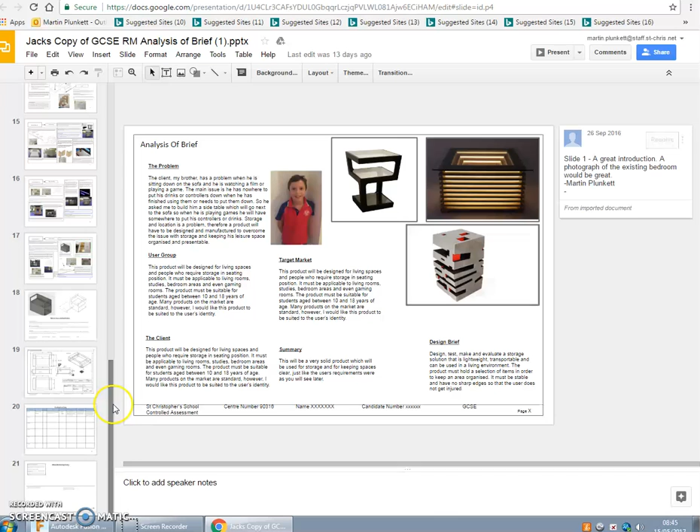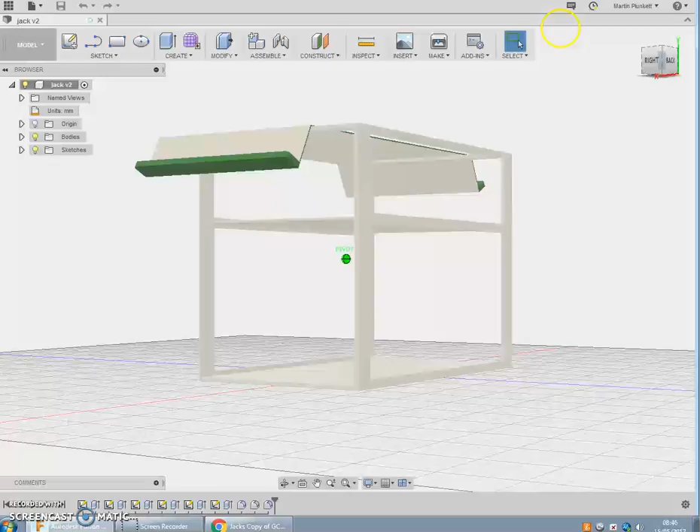Now, if we look here, you can see there's the product. Looking at the journey, I'm going to take you through a whole tutorial of how to build this storage unit for a computer console, PlayStation 4, games and peripheral devices.

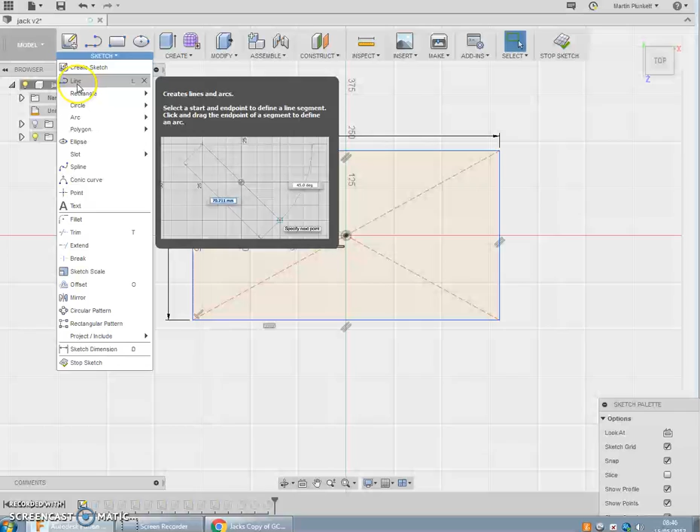So the first thing we do, if I just edit sketch, you can see that the table was 800mm by 450. So all we'd do is go up here and sketch a 2-point rectangle, 450 by 800. That would be your base. If I just go into an isometric view, stop sketch, you could then see the next stage.

Would be to extrude that to a height of 600mm. So if you go back to that original 800 by 450, I've extruded that to 600, so you end up with a solid rectangle.

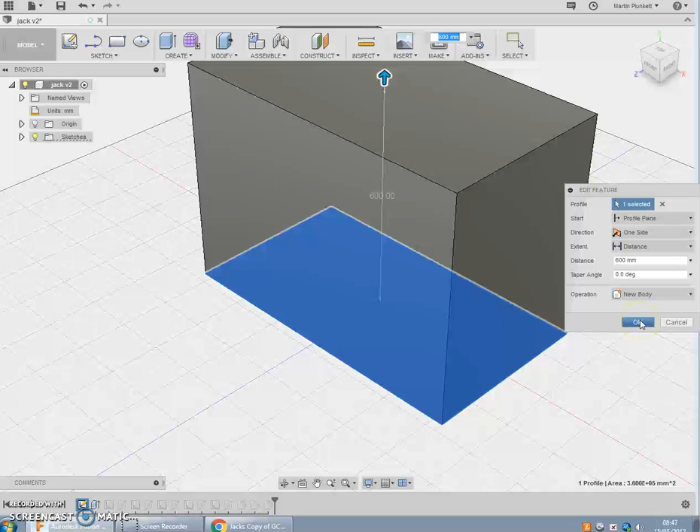Now, many students struggle with this, but if you make it to scale, exactly 1-to-1 scale, then it's very simple to turn that into a DXF file. You can save it and CNC machine it on a router. So if I just click on stop sketch again, good.

The next stage, what I would do then, I'd look at the side profile and I would draw two rectangles, again 2-point rectangles with an 18mm thickness. In fact, in this case, it wasn't 18, it was 9mm oak-faced MDF that we used.

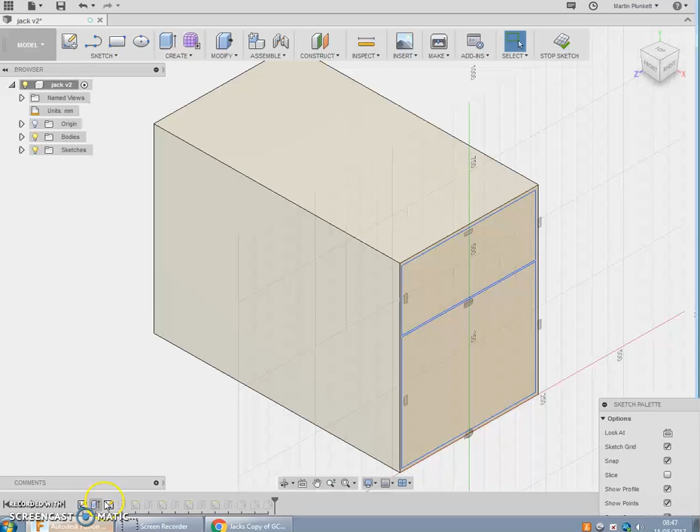Again, if I click on stop sketch, you can see on the next bit there, all we would do, we'd cut that through both sides, so you'd end up with a shell. That would be the upper shelf, and that would be the lower.

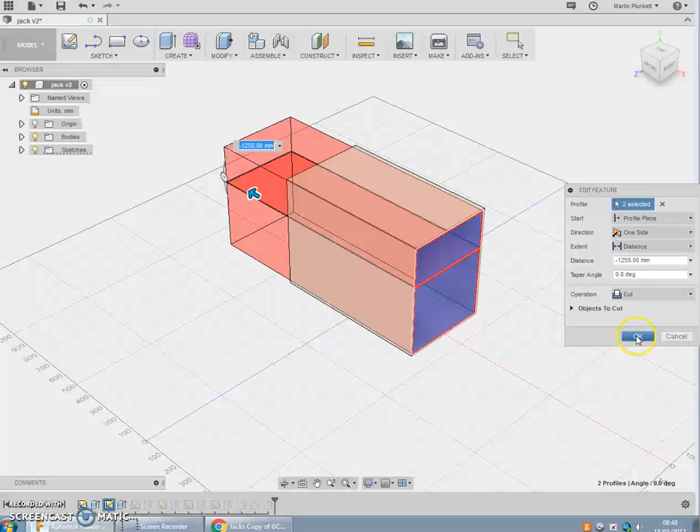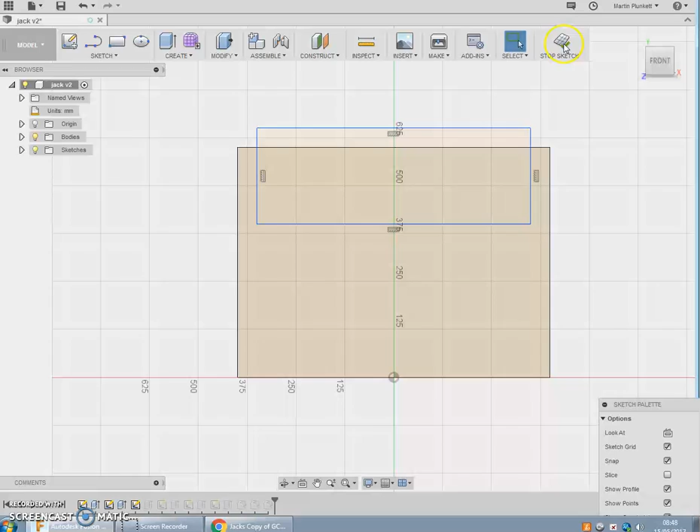And it's quite a nice way of teaching your students how to produce a GCSE project. So the next sketch, if I look at the next one here, edit sketch, you can see now that I'm going to cut out that whole section because that was going to be the roof part of the product.

So if I click stop sketch again, you can see what happens with that. Edit sketch, and that would be cut back 400, leaving a space at the back, because on top of here there's going to be a drawer. We're going to use two interlocking hinges that slide out on a roller system, with a push fit.

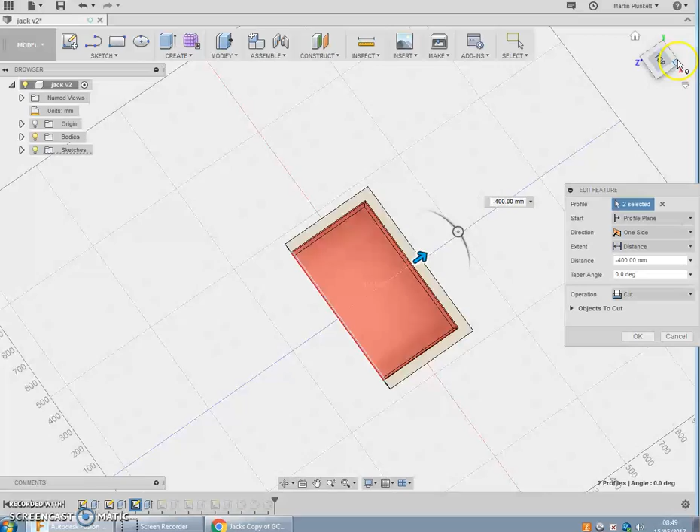Very useful indeed. So the drawer would slide out over this part, over this compartment. So I'm happy with that.

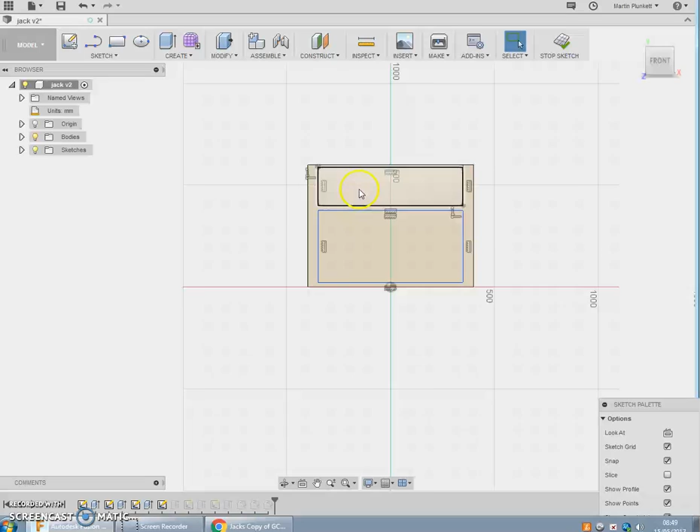So the next stage, we'd look at this part. I would just double check that you've cut out the bottom and the top. Again, we're removing that material, and this is where you're going to store the PlayStation. It could either be top level or bottom, it doesn't really matter, but the student has considered all the dimensions for the PlayStation console and the games, and they fit into the upper or lower part of the product. So I'll stop sketch again.

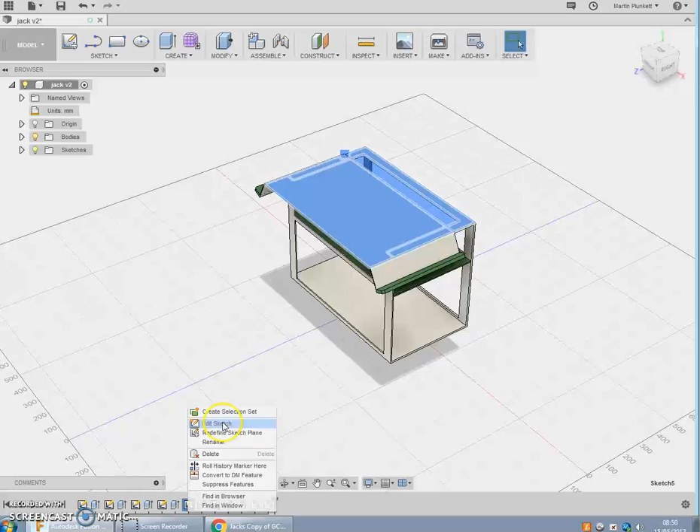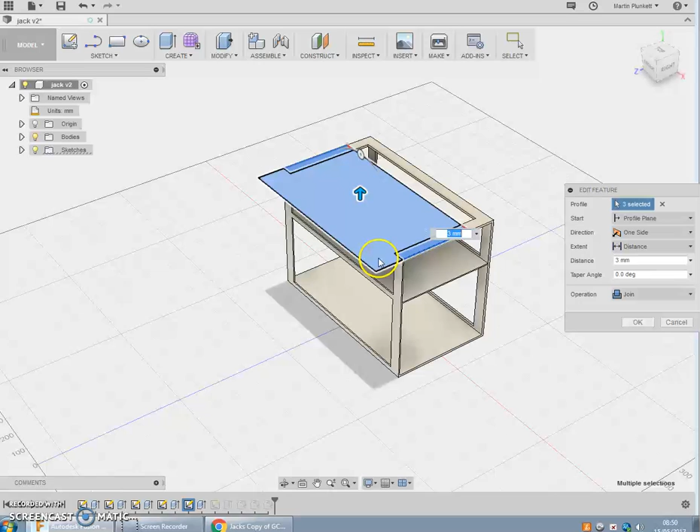The next stage, what I've done here, you can see we've mapped out that section. And again, edit feature, this part would need to be extruded to 3mm, because 3mm was the thickness of the acrylic. The acrylic top that slides over was 3mm. So that's a good start.

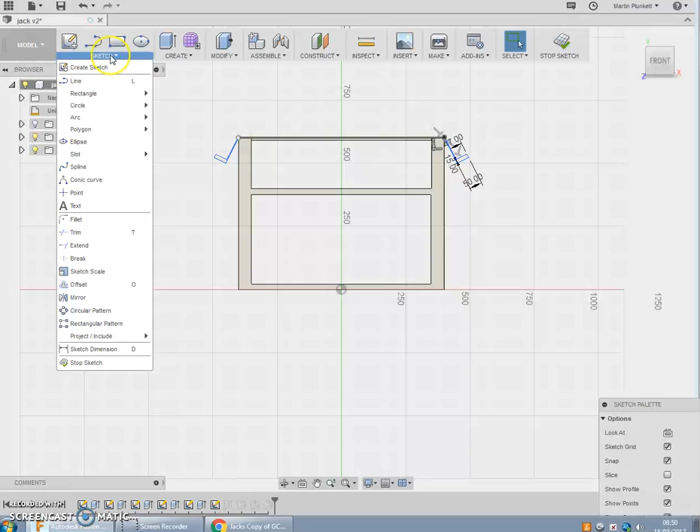After that, edit sketch. We then draw the two sort of L-shaped pieces, and what I always tend to do is put a centre line in. I've deleted it on here, but a centre line in the middle, and then you choose a mirror, so you would mirror that pattern about the centre line to get a replica on the other side. Okay, so you'd select the object and mirror at that point there.

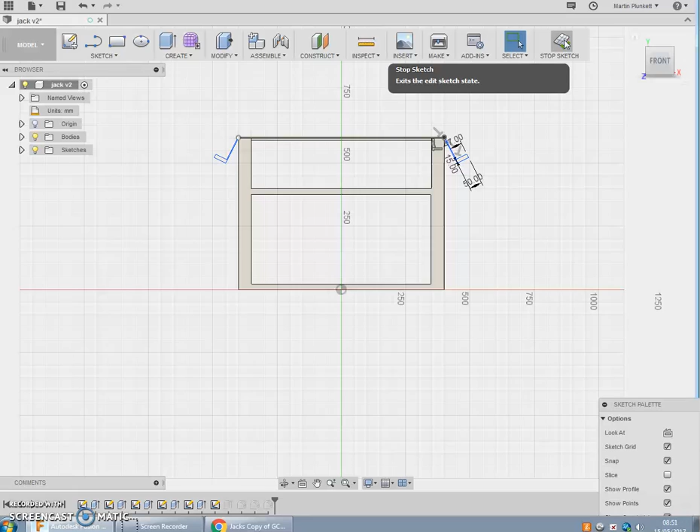This is just a run through, just so you can visually see what and how we did this, because you think about it, in the GCSE, the students are only required 2 hours to produce the engineering drawing. So I'm going to click on that, edit feature, that would then be extruded to a distance of 450, which then coincides with the length from here to here, and that would roll out on this lovely drawer system.

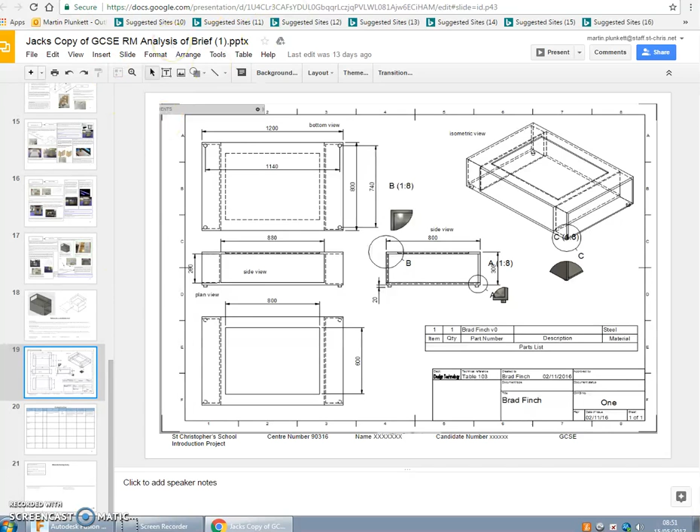You'll see the finished item. If I just click on here, if I go down to the bottom here, just come out of that, that's fine. Yeah, there's a part of the drawing, so that was going to be the sliding lid.

But you can see visually, from a student point of view and an examiner's point of view, you've got a cutting list, a 3D sort of shape, an isometric view, a rendered view, an engineering drawing with a front view, plan view, side view.

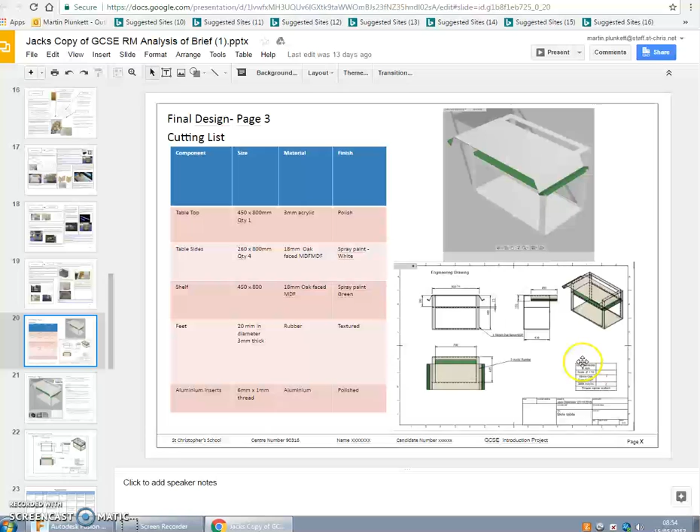From that, we can then produce a drawing with the processes, techniques, and the final engineering drawing is here. This is why we find Fusion 360 very useful.

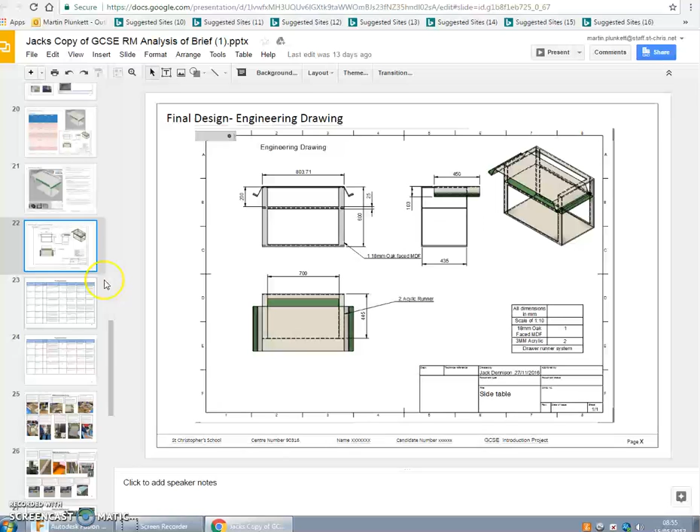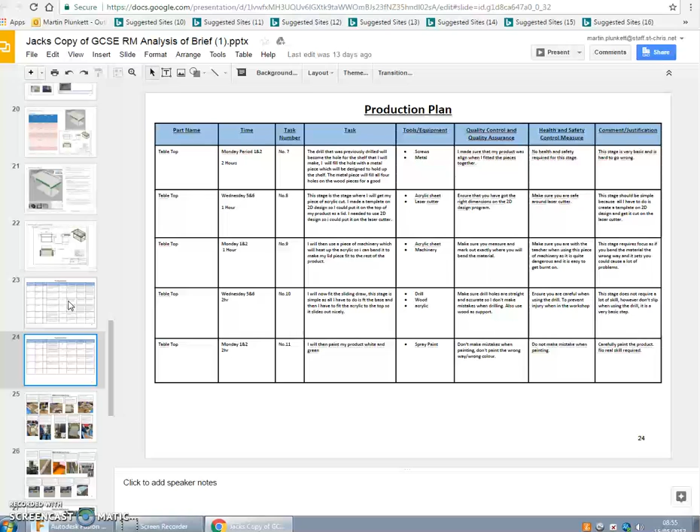If you've got a good finished product, you can produce a detailed production plan with the part name, time, task number, the task, tools and equipment, quality assurance, health and safety control measures, comments and justifications. This may not be one of the better projects, but it's at least middle of the road.

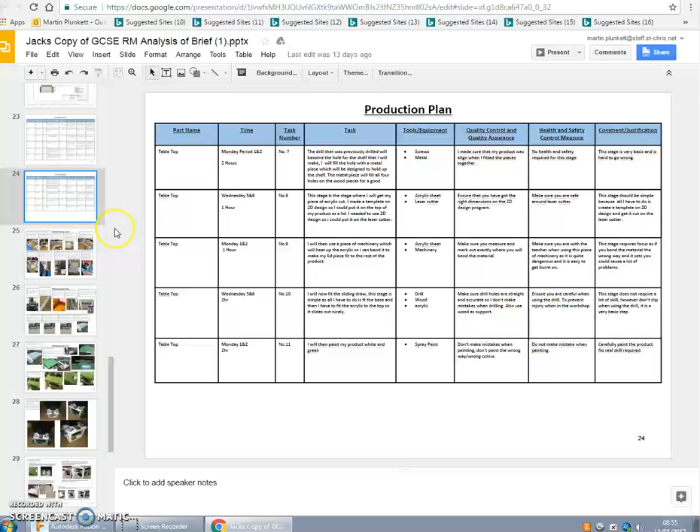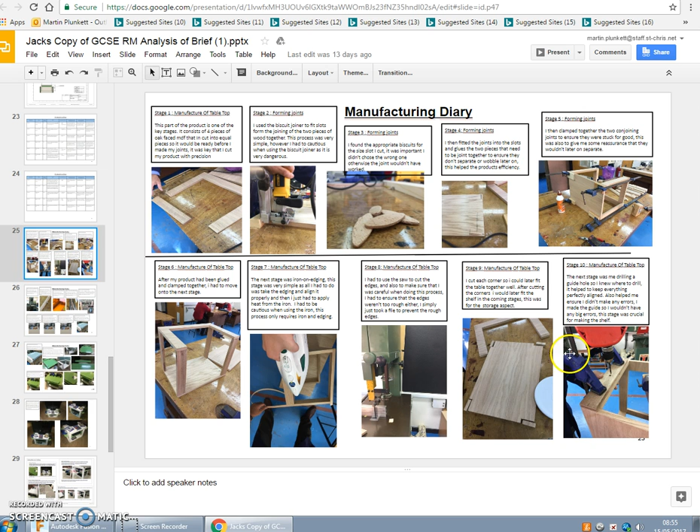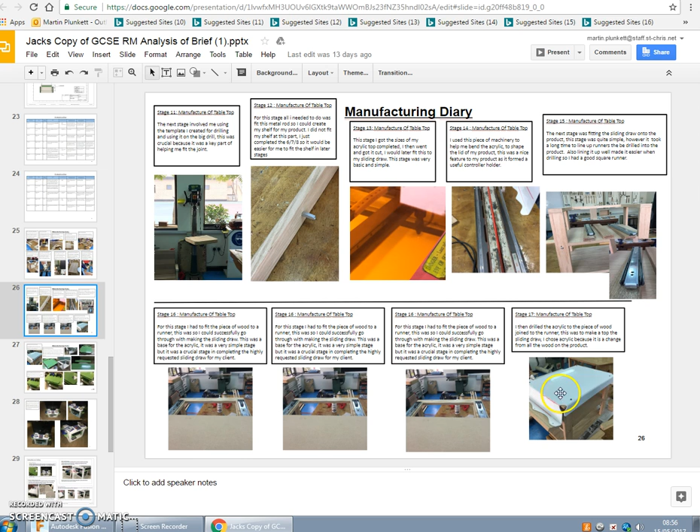It's a good logical sequence of production plan, and it's very useful, which leads on to the manufacturing diary. So we've got biscuit joints, frame construction, iron-on edging, use of hand tools, inserts, laser cutting, strip heater. These were the draw runners, again with the push fit, 18mm frame. It's slightly different to the engineering drawing, but that's what happens during production - things change, and students realise there are alternative ways of making it.

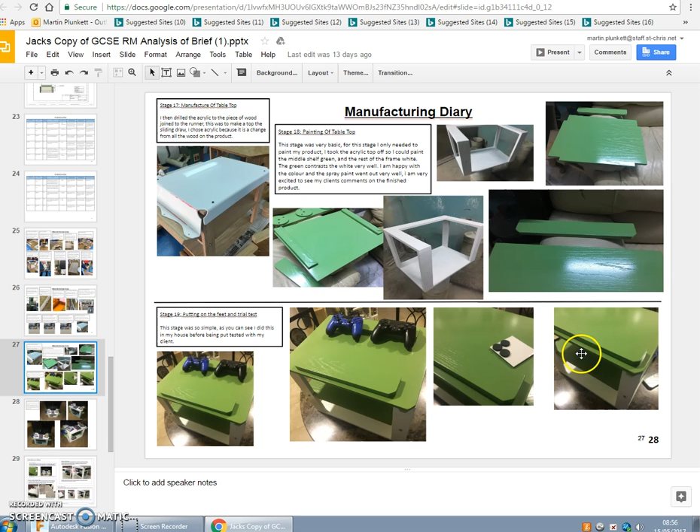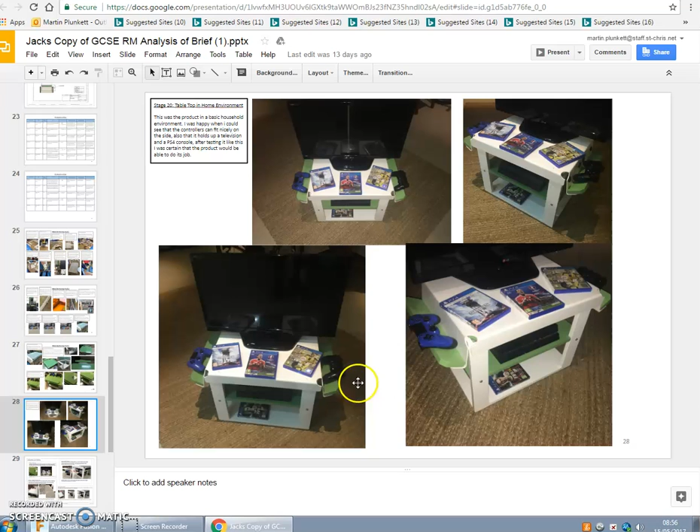Down here you can see some of the stages, some of the testing that was done, and the painting during manufacture. This is the finished item, with TV on top, game controllers - everything fits in quite nicely.

Testing - what we tend to do is a drop test, capacity test, functional test, making sure the draw runners slide out nicely without any kind of defect on the lid. We also get the students to do a liquid resistance test to make sure the work is completely waterproof and functional, and a weight test. That's basically what we do.

And then a client summary as per GCSE specification. So really, it was kind of a side table with a difference.

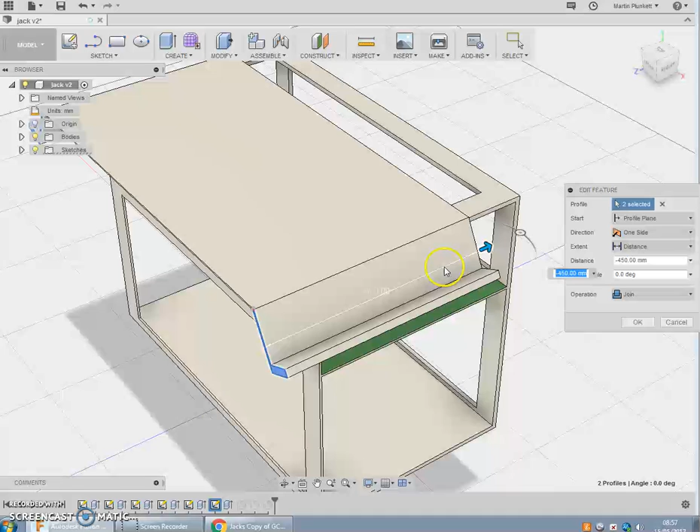Okay, good, let's go back to Fusion. There's the 450, we click OK on that. Again, that was extruded. Then you would just edit the feature, come along and add your radiuses on these edges. So I put a 10mm edge on there. Job done.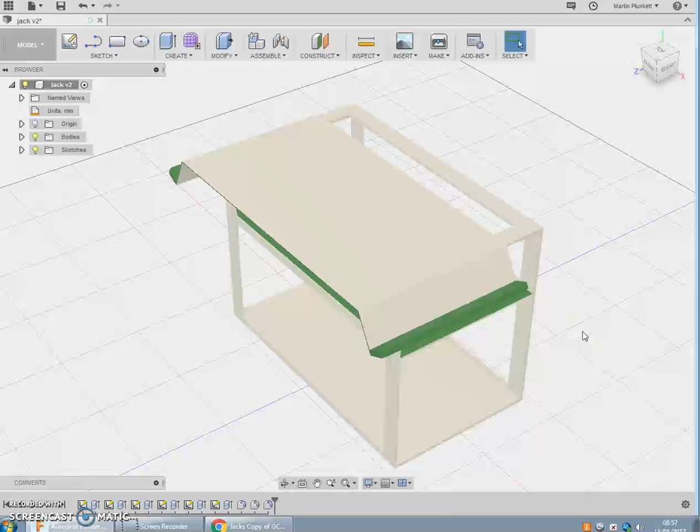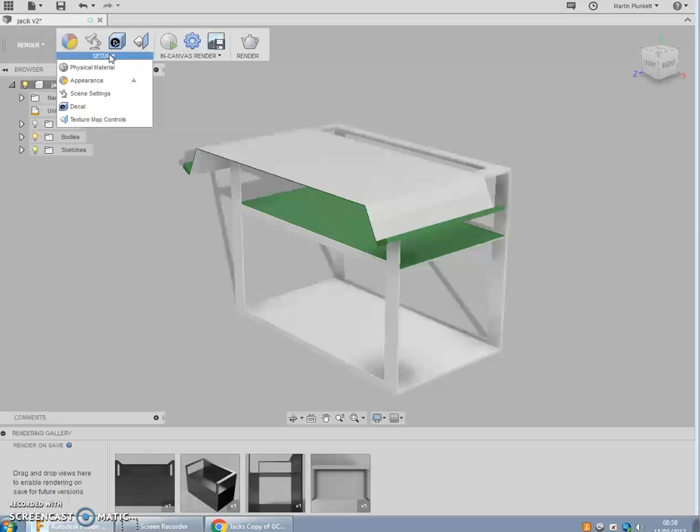Before I finish off, what you can do as well is click on model, go to render, and do a quick render. Down here you've got these different views - a front view, isometric view, a side view, and a plan view of the product.

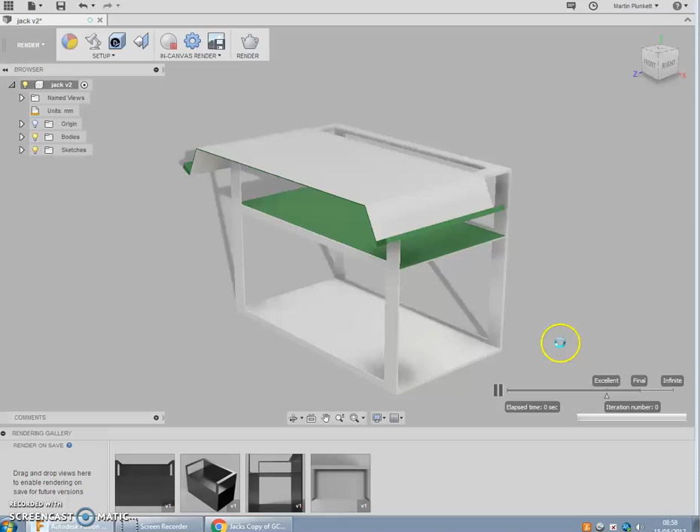That's quite handy. But if I go up here, you've got physical materials - if I wanted to change the appearance, I could change that. But what I tend to do is an in-canvas render, like so. I click on that, and it does an in-canvas render quickly - that's only 6-7 seconds rendering.

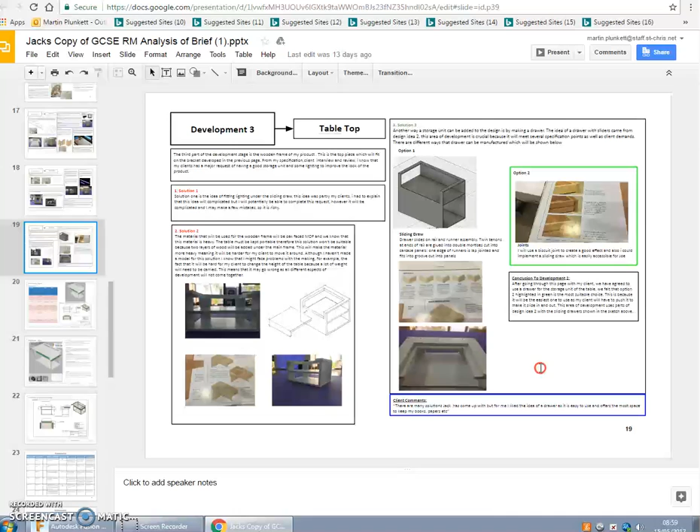The students can then print screen, bring that into the folder, and use it for their development. If I press print screen, I could screenshot it, come back into here, and if I want to do it as part of a development, I'll dump it in here for now, just for the sake of it. Paste it in there - in comes the screenshot. You would crop the image accordingly.

Now just grab hold of that, make it slightly smaller, and the same here. What I like about it is that could then be inserted into Google Slides - we use Google Slides, very quick and easy. There's a screenshot - if you look at that in comparison to the model here, it's very similar. It works, it's really good.

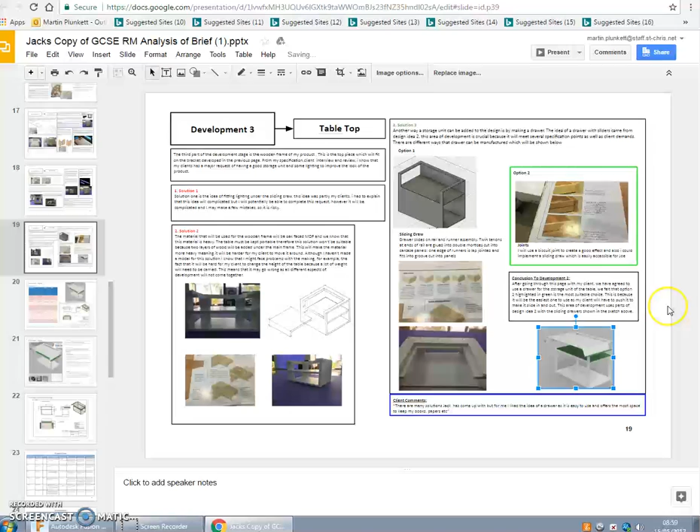I'll just nip back into Fusion, and if I wanted a different view, I can rotate the model - now I'll have a look from behind. I can zoom in again for more detail, and structurally you can see the makeup of the product.

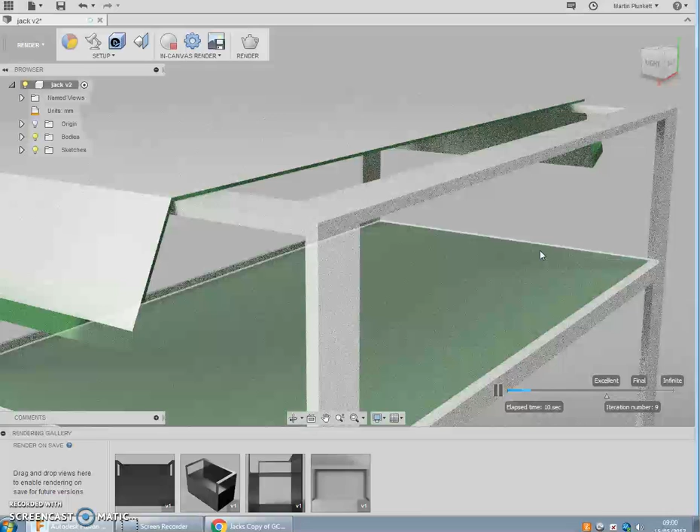In final manufacture it did change slightly, but that's normal. The physical CAD drawing was a resemblance of what the student intended on making.

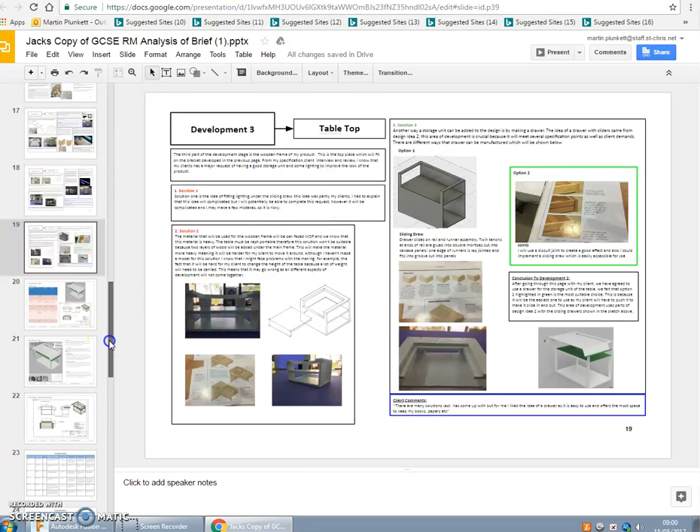I could do the same again - print screen it, bring it back into my Google Drive, and use that, say here. If I go into slide 18, dump it in here, paste, and use that accordingly. I'd crop that image, reduce it, focus on the part I'm looking at - so I'm looking at the biscuit joint on the top there, that's all I'd be interested in.

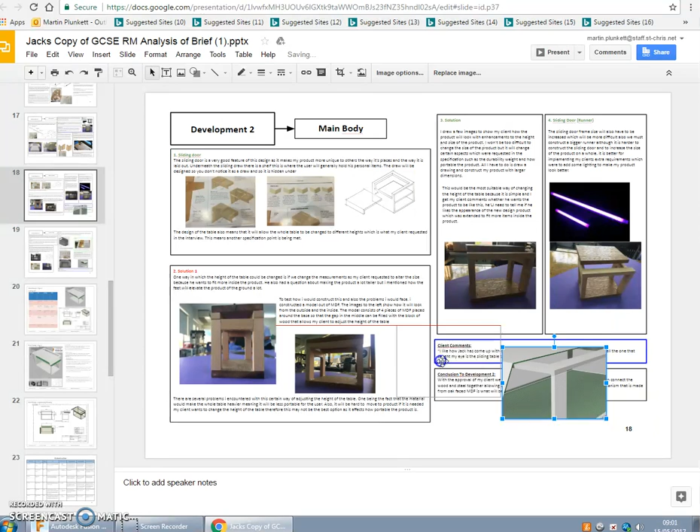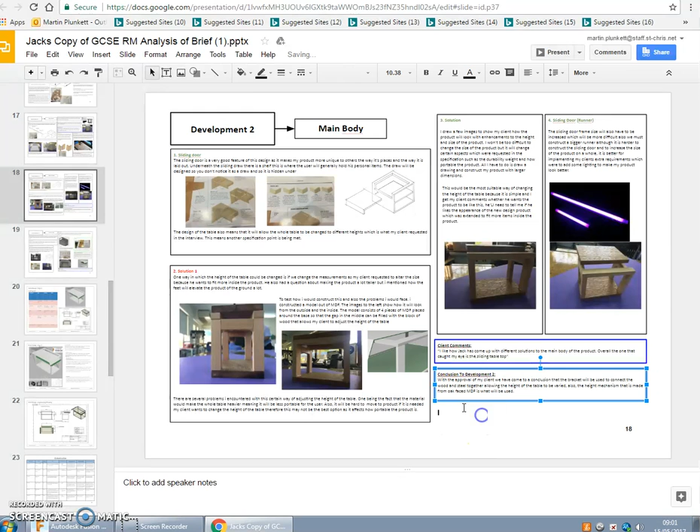If you look here on the modelling, the physical models that were made out of MDF, you can see the CAD drawing does fit in with the physical model that was made by the student. Now, he didn't use this in his final GCSE folder because this wasn't the final idea, but it works. Anyway, let's go back to Fusion.